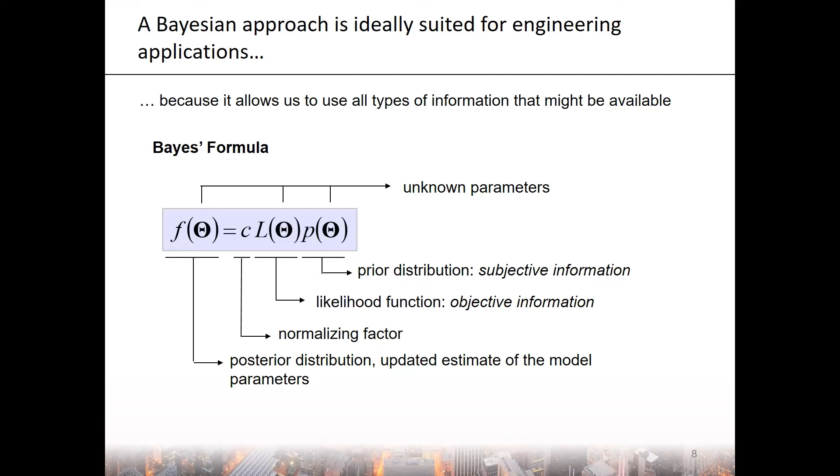Next, I would like to give you some examples where we have used machine learning specifically for civil engineering applications. Our goal as civil engineers is to develop safe, sustainable, and resilient infrastructure. Infrastructure provides vital services that support and enable societal functions, and ensuring the reliability and resilience of infrastructure is critical for public well-being. We need to increase the resilience, the reliability, the functionality, and reduce the duration and frequency of service disruption.

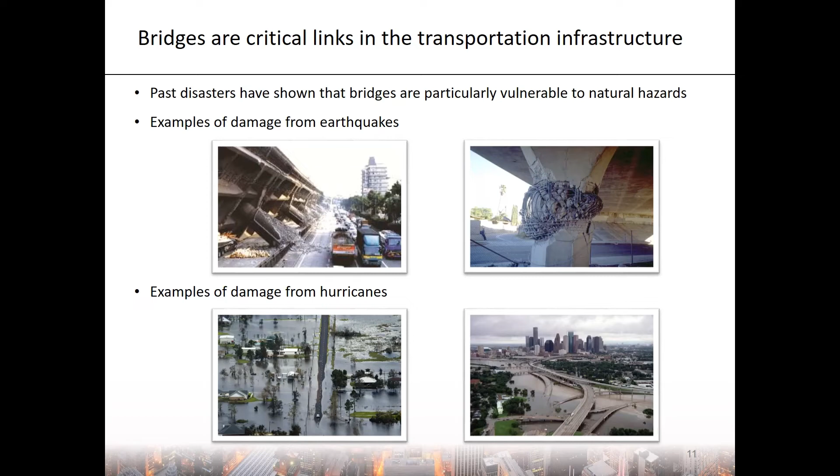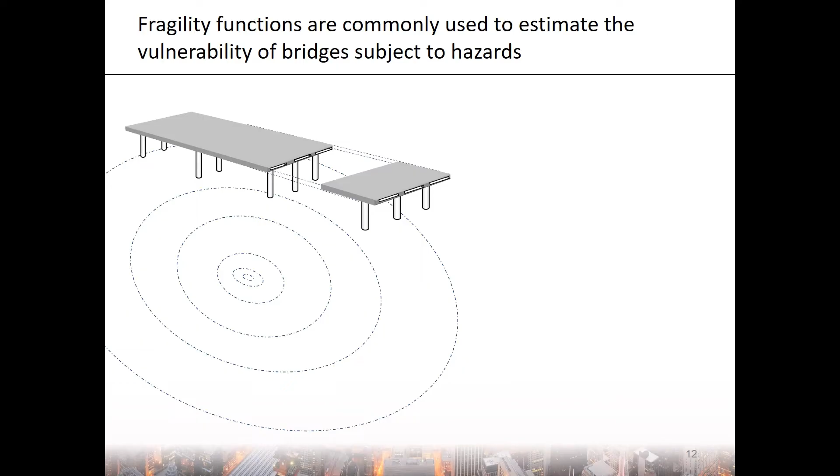Fragility functions are commonly used to estimate the vulnerability of bridges subject to hazards. For example, let's consider a reinforced concrete bridge, like the one I'm showing here, subject to an earthquake ground motion. We're interested in computing the fragility of the bridge, which is defined as the conditional probability of attaining or exceeding a specified damage state for given measures of the demand, which in this case are given measures of the ground motion intensity at the site of the bridge.

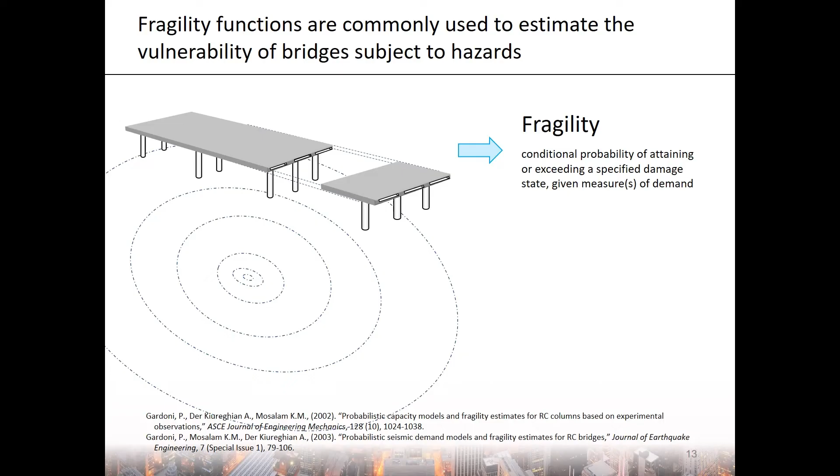There are three fundamental steps in developing fragility functions. First, we need to construct probabilistic capacity models that tell us, for the given geometry and material property, how much force and deformation each column will be able to sustain before failure. Then we need to construct probabilistic demand models that give us the shear and the deformation demand that each column will be asked to sustain for a given ground motion. And we need to do this for every column in the bridge.

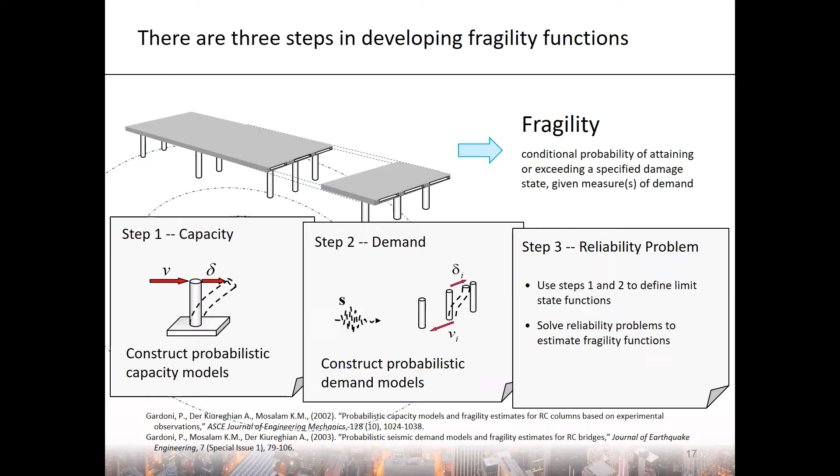Finally, as a third step, we can conduct a rigorous reliability analysis combining the probabilistic capacity models and the probabilistic demand models to estimate the conditional probability for the bridge. Now, machine learning can be used to efficiently develop the probabilistic capacity and demand models that are needed to construct the fragility functions.

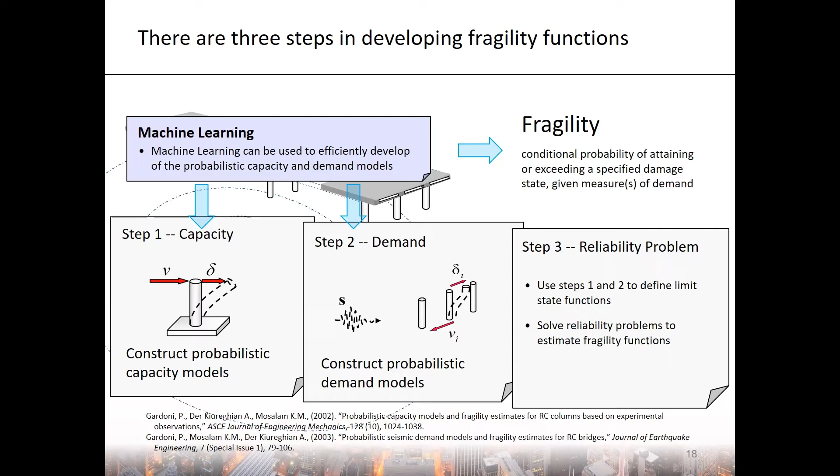Also, infrastructure suffers from aging and deterioration over time. Aging and deterioration might considerably reduce the service life and reliability of infrastructure. They are becoming a growing problem for all types of infrastructure in the US and everywhere else in the world. And they are making damage data from past events, when there was less deterioration, less informative, making empirical fragility functions not very helpful.

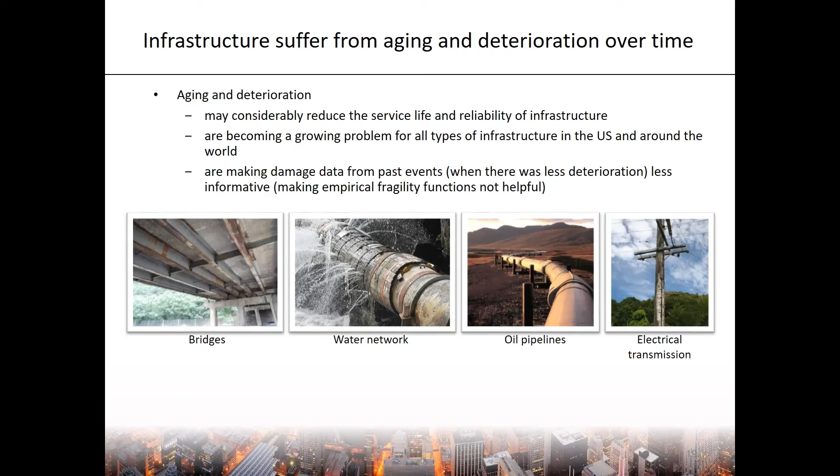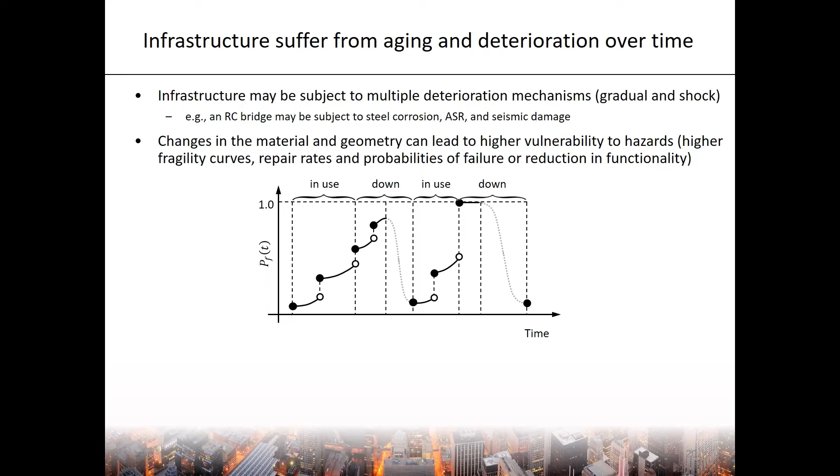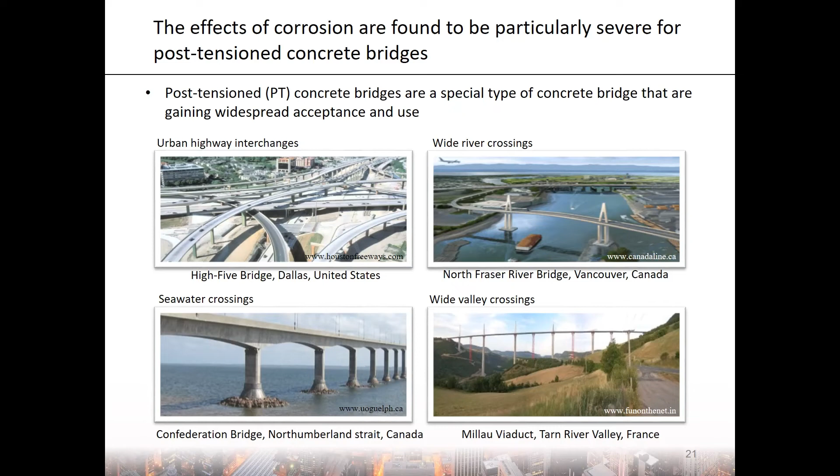Infrastructure might be subject to multiple deterioration mechanisms like corrosion, alkali-silica reactions, or even past seismic damage. Changes in the material and geometry due to these deterioration processes can then lead to higher vulnerability of the bridges or the infrastructure to multiple hazards, which means higher fragility curves. Specifically, the effects of corrosion are found to be very severe for post-tension concrete bridges. Post-tension concrete bridges are a special type of concrete bridges that are gaining acceptance and use around the world.

Post-tension bridges have many advantages. They have improved constructability and shorter construction times, improved sustainability, and higher flexibility in geometric design. Overall, they are more economical than other bridge types.

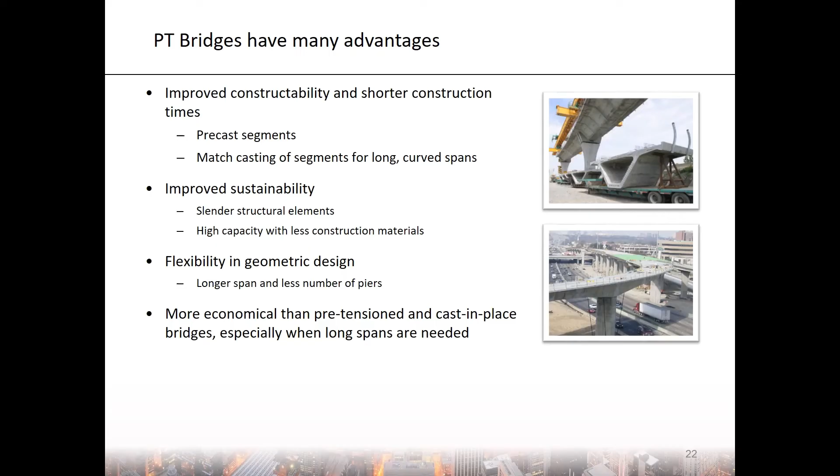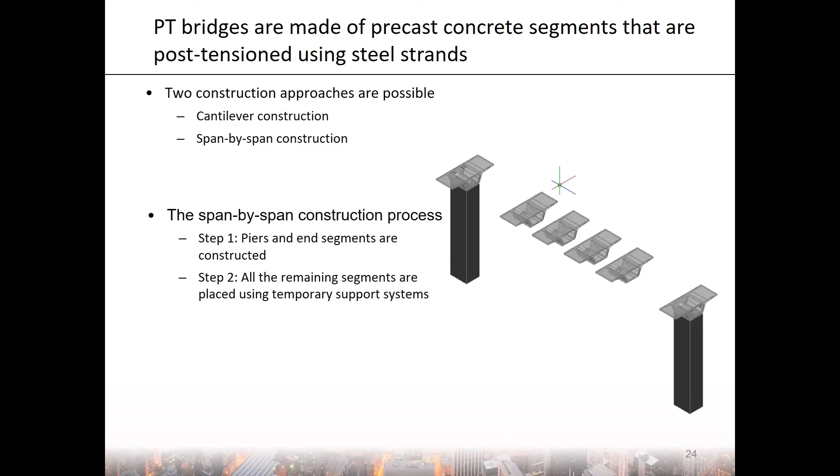Now, to understand why they are so vulnerable to corrosion, we can look at how they're constructed. First, the piers and the end segments are erected, and then the remaining segments in between piers are kept in place using temporary support systems.

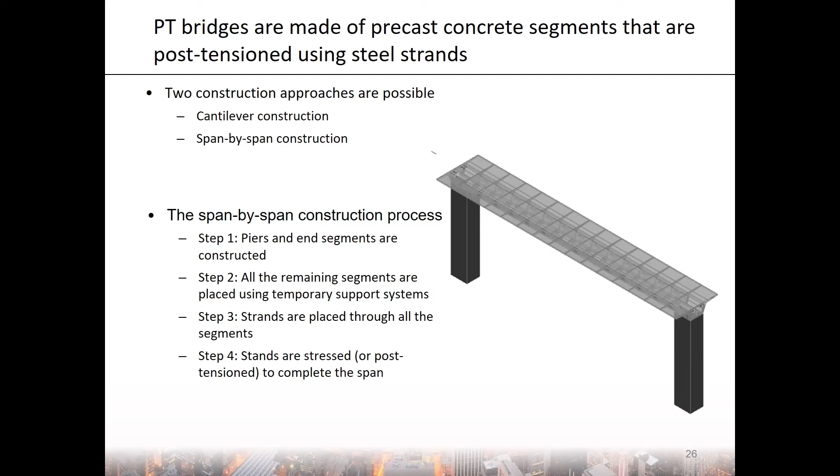When all these segments are in place, strands are placed through all the segments. I'm just showing here some segments so you can see the strands. Then the strands are stressed, or post-tensioned, to keep the segments in place. However, the presence of many unwanted voids inside the ducts that protect the strands can lead to accelerated corrosion, making bridges very vulnerable to deterioration.

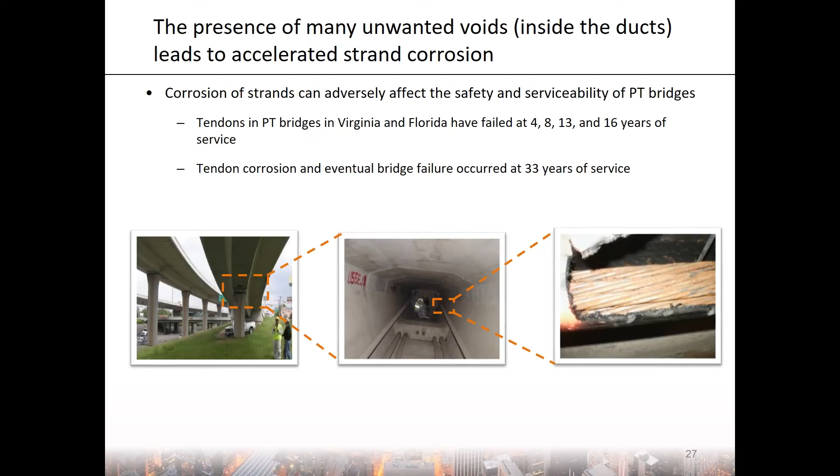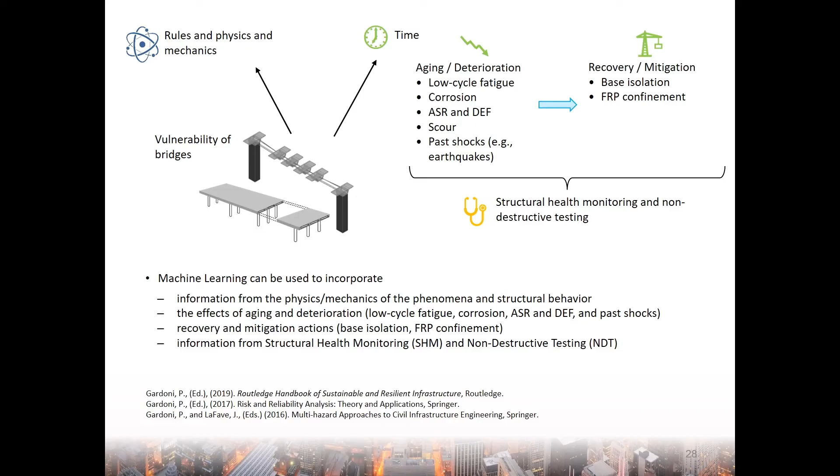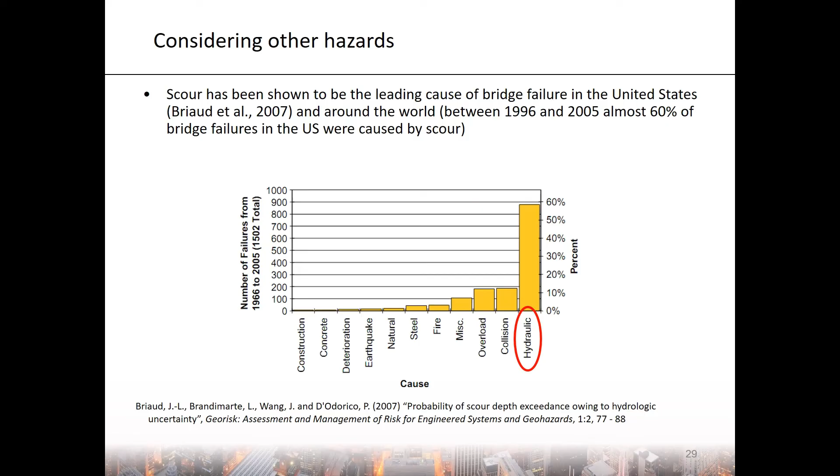Now, so far I was talking about failure of bridges subject to earthquake ground motions. However, scour, which is the erosion of the foundation around the piers, is found to be one of the leading causes of bridge failures, not necessarily earthquakes. So machine learning can be used to assess the structural capacity and demand of columns subject to scour, just like we saw earlier in the case of earthquake ground motions.

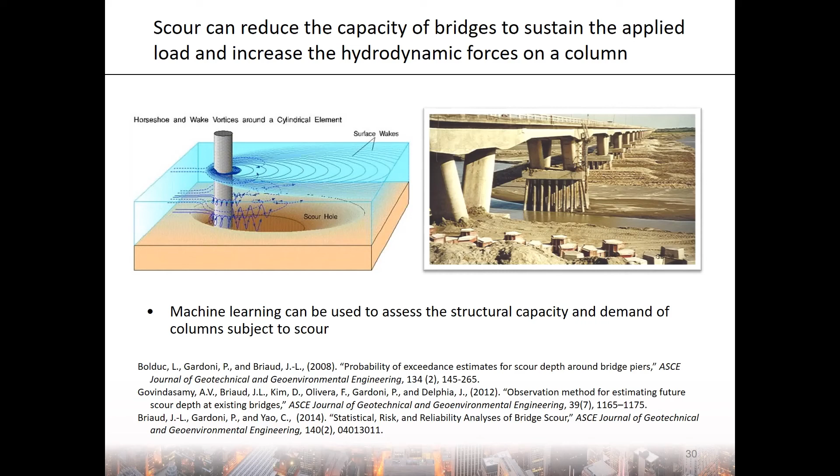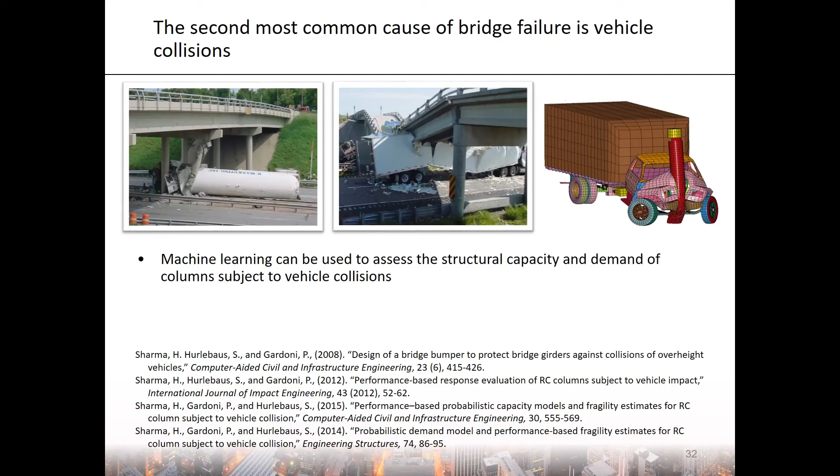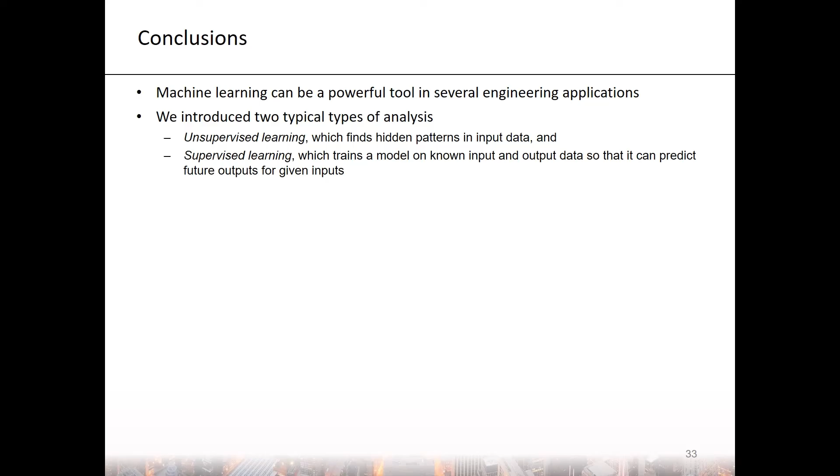So, in conclusion, machine learning can be a powerful tool in several engineering applications. We introduced two types of analysis. Unsupervised learning is one; it finds hidden patterns in the input data. The other is supervised learning, which trains a model on known input and output data so that it can predict future outputs for given inputs.

Civil engineering can use machine learning in several ways. One example I presented today is to develop probabilistic models that predict the future response of structures. In particular, we saw that machine learning can be used in predicting the probability of failure of bridges by providing models for the probabilistic capacity and demand of a bridge.

Machine learning can also be used to consider the effects of aging and deterioration, to consider recovery and mitigation strategies, and to include information from structural health monitoring and non-destructive testing. I gave you some examples focusing on seismic excitations, but machine learning can be used in the very same way, also considering other hazards like scour and vehicle collision, just as two examples.

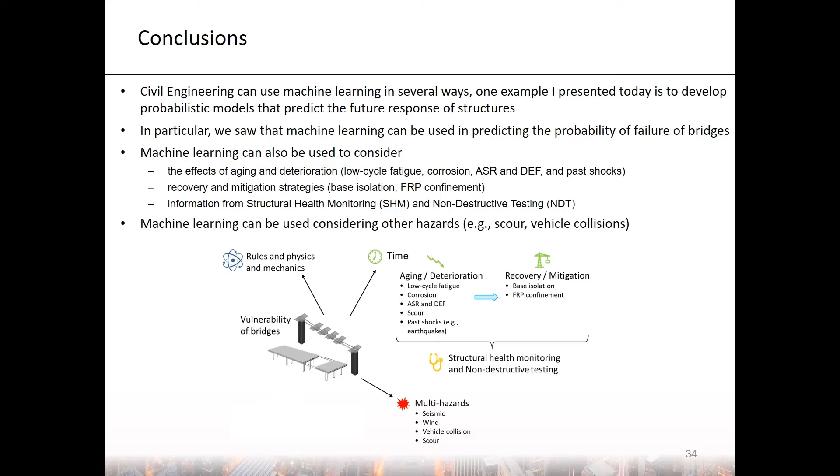Many articles on machine learning can be found in the journal Reliability Engineering and System Safety. In fact, we recently published a collection of articles on physics-informed machine learning for reliability and safety. If this is a subject of interest to you, I encourage you to look at this collection of articles.